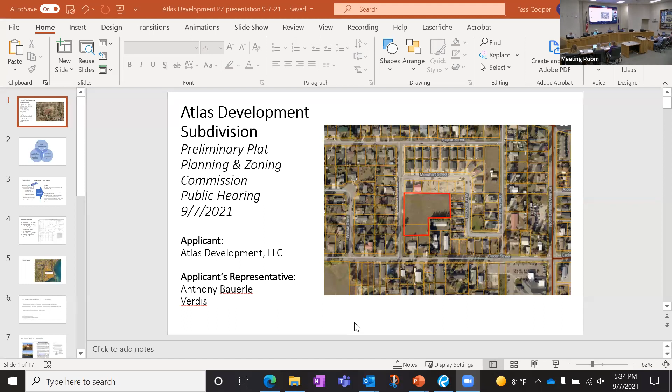Okay, this evening we're here to hear the Atlas Development Subdivision Preliminary Plat. Applicant is Atlas Development LLC. The representative this evening is Anthony Bauerle from Verdis.

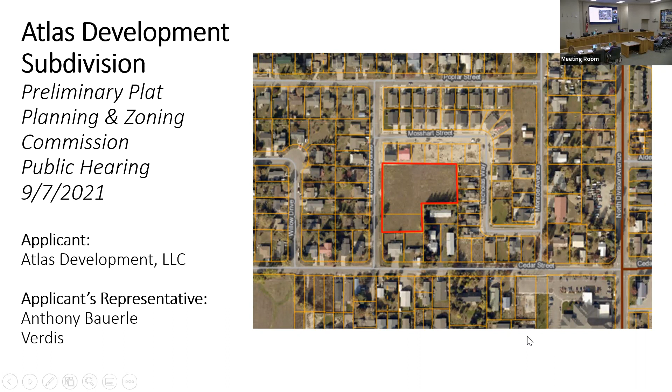And I know you've seen this diagram before. Subdivisions are a combination of comprehensive planning, zoning and subdivision codes, as well as transportation plans, and where they meet in the middle is where we have approval for new subdivisions in our city.

The procedures for subdivisions, quick overview for you. Preliminary plat stage is where we're at. This is where we overview the general compliance with applicable requirements, including zoning under Title 9, subdivision code under Title 10,

related plans, such as the comprehensive plan, the multimodal transportation plan, and the urban transportation plans. And we look at adequate provisions for infrastructure and services, including any offsite requirements.

After the stage of preliminary plat, what happens after tonight if we move this project forward? The project proponents will develop the infrastructure as constructed in their proposed plans, and then once that is complete, then they'll come back with final plat.

We'll overview again for substantial compliance with preliminary plat conditions, the required public infrastructures, resulting in the lots available for water, sewer, or served by our water, sewer, emergency responses, and so forth.

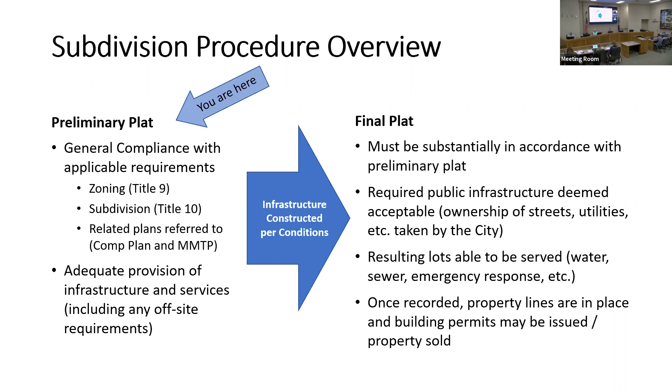Tonight, the subdivision looks a little bit like this. It is a proposal to subdivide approximately 1.79 acres into 10 buildable single-family lots, including 1 flagpole lot and 1 unbuildable stormwater tract. The lot sizes as proposed range between 5,000 square feet and 7,900 square feet. And the zoning for this designation is residential multifamily.

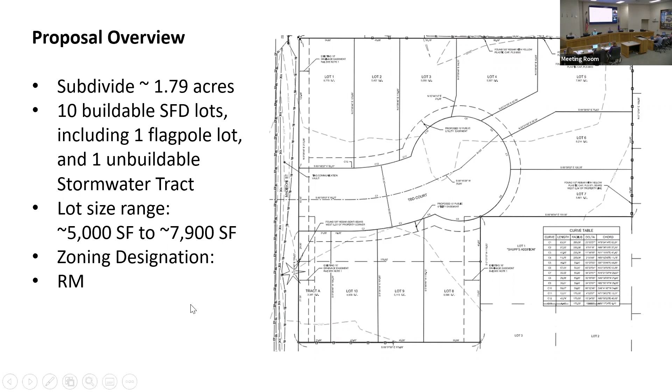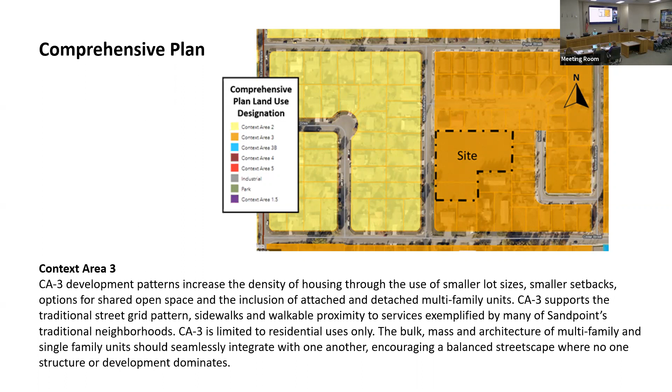Yeah, in this case, the block length is measured along the new street. The distance between intersections is also cited in the staff report in a separate section. Is that 300 feet as well? It is more in the 250 range. I'm sure I can dig it up, but 273 and 224, I believe, are the approximate distances. Okay, thanks, Tess. Yes, sorry. Thank you, Dan.

The zoning designation is residential multifamily, which requires a minimum lot size of 5,000 square feet. All of the lots have or will meet this requirement.

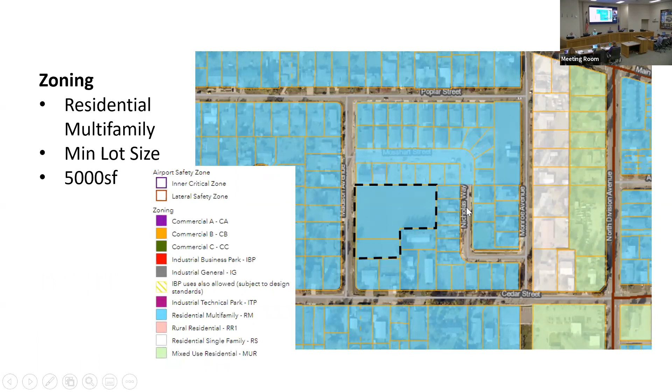An overview of the subdivision plat map, again for your review.

And a quick overview, I apologize, it feels like these are out of order. They are, I'm not sure why it's not showing them all in that order. Skip it. I apologize, for some reason it is skipping every other slide. Just hitting the next bridge slide. So that's what threw me off.

So your packet materials, I'm going to go back and add in here for you. I apologize that it'll be in not view mode, but I think we can see it well enough. Included in your packet materials is the staff report analysis with complete application, showing substantial compliance with city code standards and adopted comprehensive plan materials. Attached with the staff report are the following documents for your review: the subdivision application, narrative, preliminary plat, preliminary improvement plans, trip generation, required public notices which we've amended, and written comments. And that's where I was supposed to introduce you to the amendment to the packet.

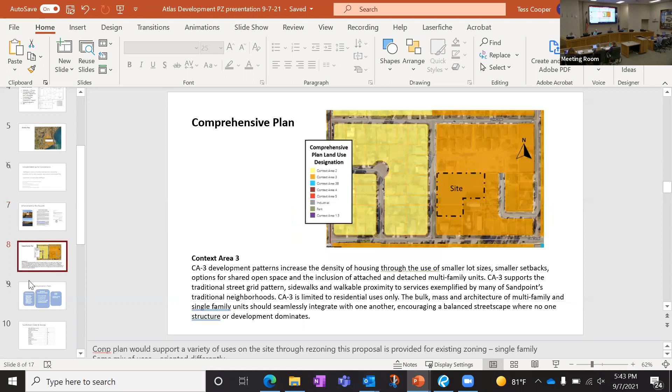The overview of how it meets the comprehensive plan and transportation plans. The comprehensive plan refers to the preference of traditional grid street patterns and the charm of neighborhoods with block lengths, and we've discussed how it meets these block lengths. Zoning code and subdivision code also address those and specify a 150-foot intersection requirement. Here are the numbers: the intersections are 234 and 270. The multimodal transportation plan, as well as the urban area transportation plan, also specifies intersection spacing of 250. So the majority of these are met—in fact they're all met—and the discussion is available in your packet.

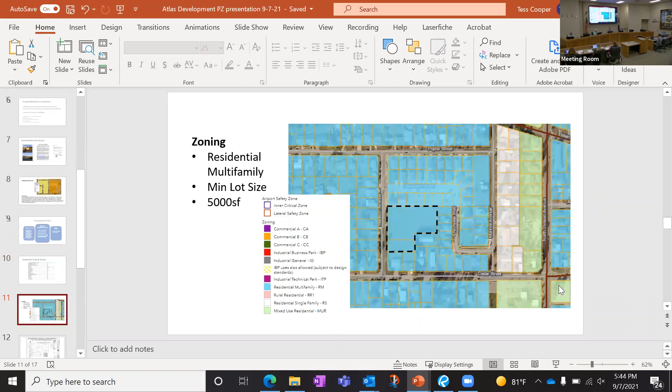Subdivisions and zoning. We've gone over the three Venn diagrams, and I showed you the overall plat again.

An important part of this packet is our public comments. I have a comment matrix here for your review, with all of the comments received to date, starting with our comment in support.

Their comments were conditional support with road repairs. They're conditionally in support of this project with road repairs and improvements, and they are concerned with traffic levels in the area, but they are in general support.

There was no specific issue, and the position was neutral from Northern Lights. If no lot is landlocked, then there are no concerns. There was no position provided from the Independent Highway District. They're okay with this project as long as structures are single-family residences only.

The position is neutral. They're opposed to two-story homes, and they're concerned with dust control and stormwater efforts. Also a neutral position: no two-story homes, stormwater concerns, and 15-foot setbacks. Also no position.

No issue was provided, but a does-not-support position was offered. We have a concern with the infrastructure load of new residences on the small town reputation of Sandpoint, as well as affordable housing for our service workers. This commenter also does not support. Another concern with responsible growth and infrastructure needs, as well as affordable housing, with a do-not-support position.

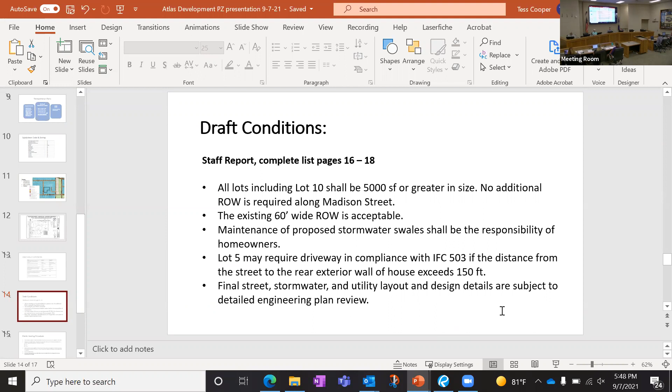The remainder of the procedure this evening is to hear a presentation by the applicants, where commission members may address questions directly to the applicant, and then open the hearing for public testimony.

Testimony will be taken in order: in favor, neutral, and opposed. We'll allow rebuttal testimony from the applicant after public testimony, then close the public hearing, and the commissioners will debate the topics. No new information at this time, only questions directed to city staff.

At this time, if we want to invite the applicant—first I'll see if there are any questions for Tess from the commissioners.

I have a question, Tess. You indicated on slide 9 - I'm getting your presentation mixed up with mine here, there it is, thank you - the comp plan has a preference for a traditional grid street pattern. This one does not have the grid street pattern; it's our third one in a row with a cul-de-sac. You made an argument, I'm not sure if it was you personally, but in the staff report on page 9 there was an argument for why the grid did not work in this case. Could you enlarge upon that, or is that something better asked of the applicant?

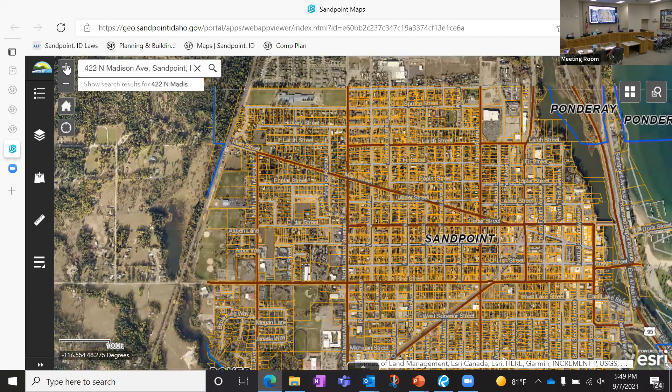There's a lot of what I call legacy lots that have not been subject to the traditional original city platting and grid pattern design, so that's what we're left with - a lot of odd and unique shaped lots with development that occurred all around prior to any preferences and regulations favoring that pattern. In this particular circumstance, the original grid pattern is visible nearby, but there's a very odd shaped development pattern surrounding this particular lot on the block. With these properties laid out the way they were, there's absolutely no way to add a through street in either direction. Because it's an oddly unique infill of the entire block, we're really only able to use a cul-de-sac in this particular circumstance.

It looks like no rights-of-way were reserved between those houses on Cedar Street and Nicholas Way, so there are no dedications, correct? Okay, thank you. I think that's all for the moment. Thank you.

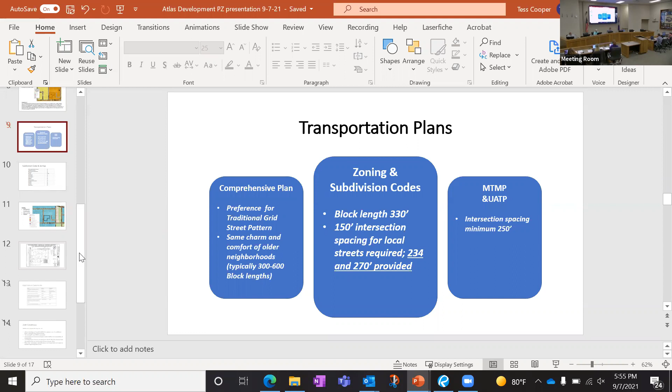Hi there. My name is Anthony Bowerly. Thank you, Chairman and Commissioners, for hearing this case, and thank you, Tess, for the presentation. It was very thorough. For brevity, I won't touch on too many things Tess already covered. I just want to highlight our intent to meet the regulating guidelines and guiding documents the city of Sandpoint has put forward, such as the comprehensive plan, zoning ordinances, the MTMP, as well as the UATP regarding traffic. I think she did a good job going through those, and as listed in the staff report, things were generally favorable and pretty conformative.

I wanted to touch on a couple things, stormwater for one. I know the design engineer on site has discussed thoroughly with Dan some concerns, and at final plat there will be an extensive design for managing stormwater. A stormwater management plan is required and will be completed. During construction, BMPs will be installed, and there will be a SWPPP and a construction general permit through the DEQ, which are required for this type of construction and land disturbance. At this point, I've been identified as the SWPPP inspector, so if anybody has questions during construction, they can call me. My information is on the application, so feel free to reach out anytime and I can answer those questions.

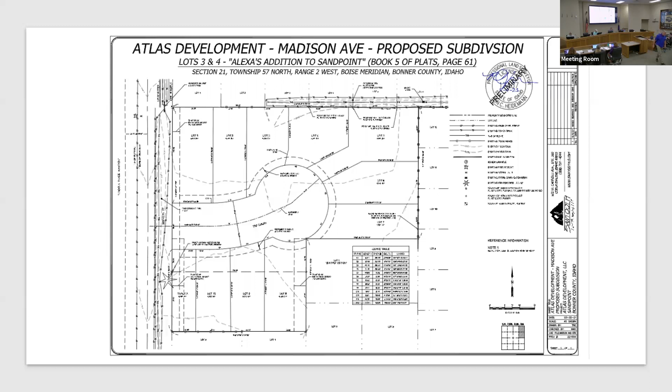Before the public hearing is closed, would the applicant care to offer any rebuttal testimony? Okay, thank you. All right, the public hearing is now closed.

At this time, the commission will deliberate. No new information may be provided, and questions may be directed only to city staff during deliberation. The staff report includes suggested motions.

I have a couple questions if I could. What is labeled as Tract A, that is the area that's being designated for stormwater management with this new development, correct? Correct. And is it possible that at this juncture, as this area is developed, the developers could work with city staff to improve the drainage problems that have already been addressed by neighbors?

I think that would be pretty challenging. I don't know the topography well enough to see what's existing. There is an effort underway.

The developer of the property to the north is working with those property owners on a solution for some of their drainage concerns, and that's being played out totally independent of this. And in your opinion, that's the best way to do it at this point? Absolutely.

Yes, to Scott's point, Mr. Brown, we chatted about this. He's done his due diligence here, and he's providing a plan that will send the drainage a different course, so we won't be adding to some of the issues that the properties to the north and the east have experienced here.

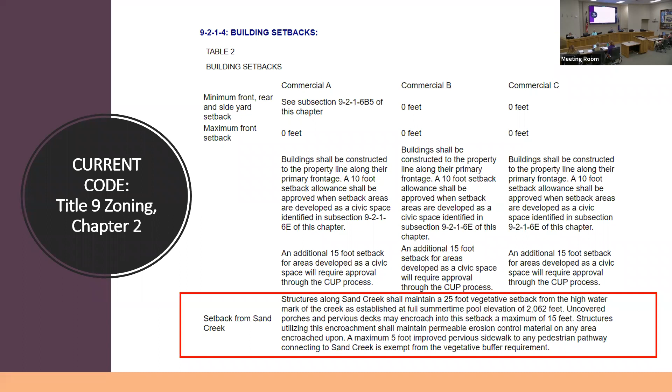And so this is the section where we're identifying the problems. In this next section, we'll talk about what the problems are or the missing pieces in this, and why it's important for us to really come back with a more comprehensive, detailed proposal for improving upon what is currently there.

So the limitations of this code are: we have a distinction between buildings versus structures that is not addressed—it just says all structures. Through International Building Code and stream requirements, it's really important for us to differentiate the definitions between what a building is and what a structure is. There are some relevant and important recreational, public access, and water dependent uses that incorporate structures that obviously need to be on or near the water and within the 25-foot setback.

The code lacks the flexibility to address site-specific conditions. In this downtown area, there's a lot of existing pavement and development as opposed to a vegetated buffer. To be able to look at site-specific requirements and conditions, it's important for us to add that in, especially with our other specific codes and links to stormwater management, FEMA, and other agencies and code-specific codes that are not addressed here.

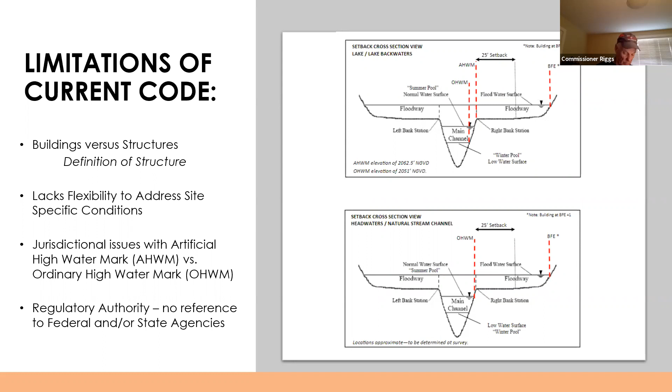Correct. And we absolutely have goals to do that detailed survey work, so that we have a much better idea in the future for the permitting process and administration of this code. At this time, IDL and ourselves just don't have a whole lot. So it'll be on a project-by-project basis to identify, which is a very common process in other areas and water bodies where it's not just a standard elevation called out in code, because it is variable. So it's really an important change for us to be able to adapt to here.

Do you mind if I interrupt for just a second? I know you wanted to get all the way through, but I think this is way more complicated than it needs to be. I think Justin from the IDL said it very clearly: the artificial high water mark is 2,062.5 feet, and the ordinary high water mark is 2,051 feet.

So my question is, the proposed amendment says where an artificial high water mark does not exist, buildings shall be set back a minimum of 25 feet from the ordinary high water mark. Do we know, yes or no, where artificial high water mark does not exist between Bridge Street and Cedar Street?

That's the detailed surveying, and that will be the project. Until we are able to do citywide surveying ourselves and get an idea of that, each project will have to survey those locations and show us where they are on their site plan.

Is it possible that one property owner could argue that an artificial high water mark does not exist, and then be able to build within 25 feet of the bottom of the creek, because that's the ordinary high water mark? No, but it really is clear where there's lake backwaters and where it's a natural channel.

So the incorporation into the proposed new code of the collaboration and cross-referencing with the other federal and state agencies is really key here. Our previous code didn't defer to them, right? That collaboration and cross-reference is going to be really key, because it would be the Department of Lands determining, upon a case-by-case survey, where that artificial high water mark applies and where it does not.

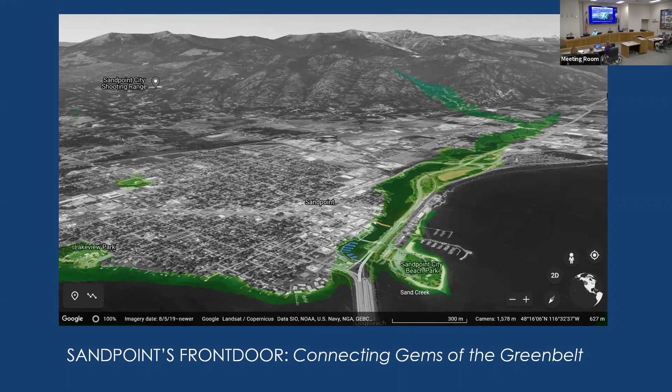Specifically for the implementation of the Park Master Plan concept for the Sand Creek downtown waterfront area, which is one of the concepts approved in the master plan, we are looking specifically at this one site - one we're all very intimately familiar with, and the site I've spent the most time on along the creek in my last few weeks. This is truly your gem, and also the same site where we're looking at continuing revitalization, something you're going to continue to hear a lot of enthusiasm for from the development community.

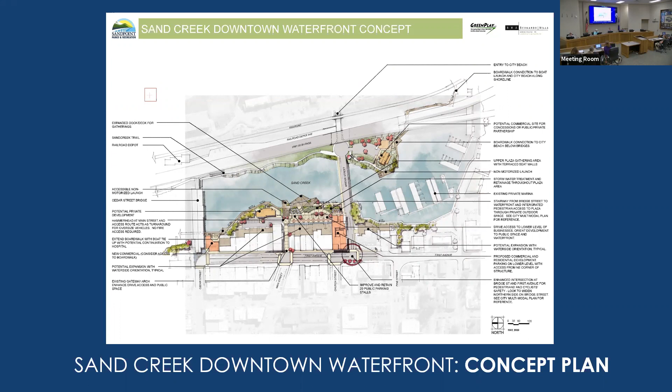This is the example concept plan that I'm choosing to focus on. This is the plan that was approved in the master plan, the Sand Creek downtown waterfront, and you can see how it's directly impacted by the code changes, and some of the development in there does overlay into the waterfront.

This next slide is the same area just blown up, and the highlighted areas show the priority areas for development of the Park Master Plan. You can start to see the picture come together, and keep in mind that this is merely a concept.

As the Parks Department develops this master plan, we take it from concept at the 30,000-foot bird's eye view and dive into detailed design development. We'll work hand in hand with the community through the public process, which will be incredibly transparent and dynamic. Your community has a strong track record of public process, and we are going to continue to build on that through this step.

But you can see right off the bat, as you blow it up, how we would start to be directly impacted with the potential to improve access, which was one of the driving priorities of the master plan.

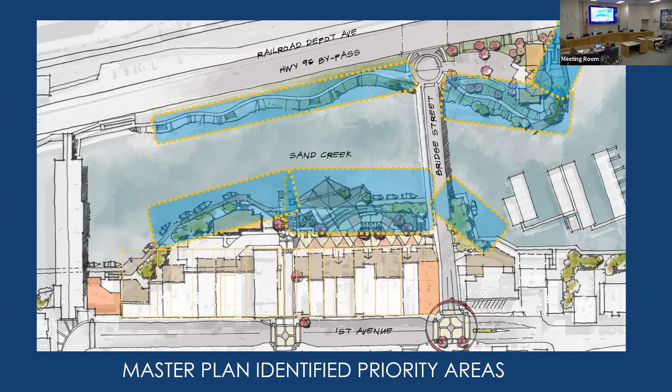This is a visualization, again painting the same story just in a different view. It shows how the 25-foot setback—this is an artist's interpretation, but an approximate 25-foot setback—would be directly impacted by the master plan overlay. You can see where my cursor is.

I overlaid the concept master plan, and if the code wasn't changed and it was left as it currently is, we couldn't build any of the boardwalk or plaza features proposed in that approved concept plan. Again, I want to remind you that it is just a concept, so as we dive into design, we'll have ample opportunity to influence its details.

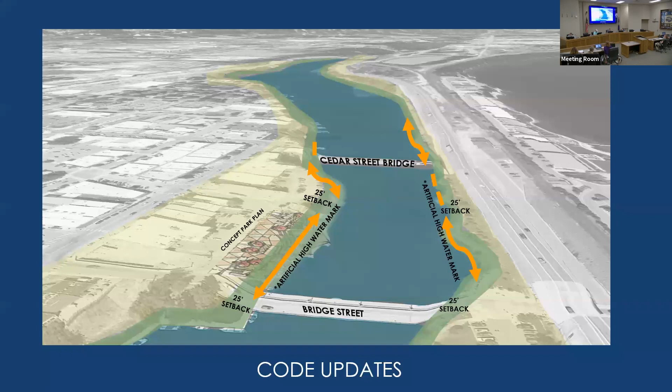That's something I highly value, and it's something I'm here to share—my years of knowledge working on waterfront projects with you, from a sustainability perspective, to the point where I'm brave enough to put in here innovative stormwater treatments as something to start thinking about.

This is just a sample rendering of what it could look like if we did start to have a combination of innovative stormwater treatments and some sort of vegetation buffer. All of a sudden now we're introducing inclusive access for people of all abilities and disabilities to the waterfront.

Across the way on the east side, that's actually a pretty similar section of what the existing conditions are, where you do have a substantial buffer and then a trail corridor—all public gathering places.

Keep in mind that when we talk about the Sand Creek area, none of that is natural—all of it has been disturbed historically. So what we're proposing through the master plan and the park plan implementation is actually making this man-made, or I should say man-destroyed, area just so much better from a sustainability perspective.

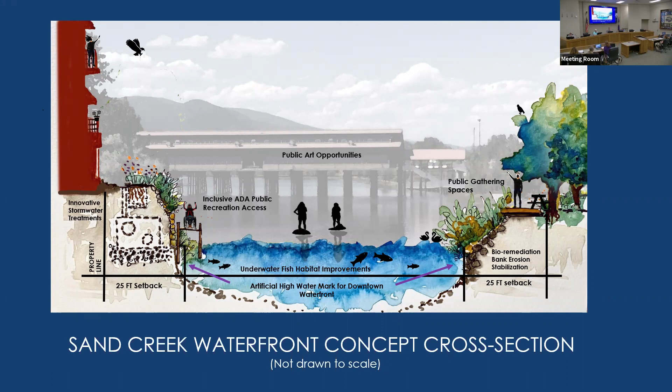So we have incredible opportunities with this new code change. I dare say, when I'm talking about what I'm referencing here, it's the stormwater runoff—that's where the nitty-gritty engineering and science and design really gets technical. This is where our opportunities are.

This is the meat and bones of the project. It's not in the plazas and the boardwalks—it's in what we can do underneath the soil, underneath the water even.

So when I talk about stormwater runoff, I'm not just talking about the surface, but it does start at the surface—it starts on the rooftops, it starts with the pavement, and what are we going to do there? Then we ask ourselves, what are we going to do just below the surface, and even more so under the water? How can these public assets, this park property, treat the stormwater runoff in that area?

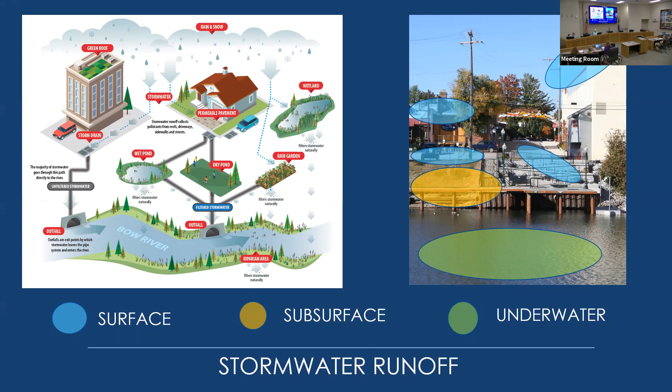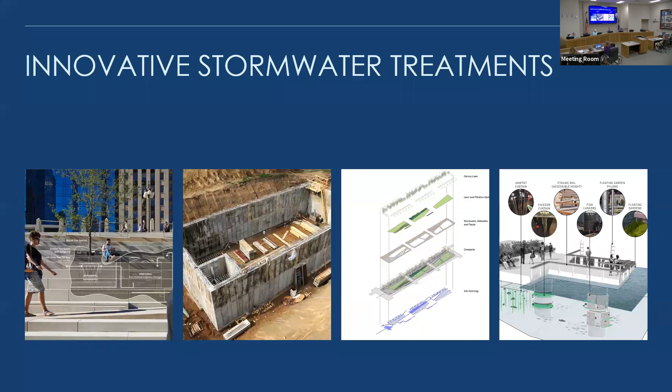The sample on the right is an award-winning project out of Chicago where they took the pilings that were structural components and added fish habitat plantings along there, creating the right environment to increase the fish habitat.

This is an example of what it could potentially look like in those areas with public waterfront gathering places. We're going to be revitalizing the community, but also activating it, making it safer for all, including people with disabilities to be able to come here.

The population of Americans who are becoming disabled - 1 in 4 of us will become disabled by the time we're a senior - and we want to be able to serve that population. Right now we have very limited access for people with disabilities to the waterfront.

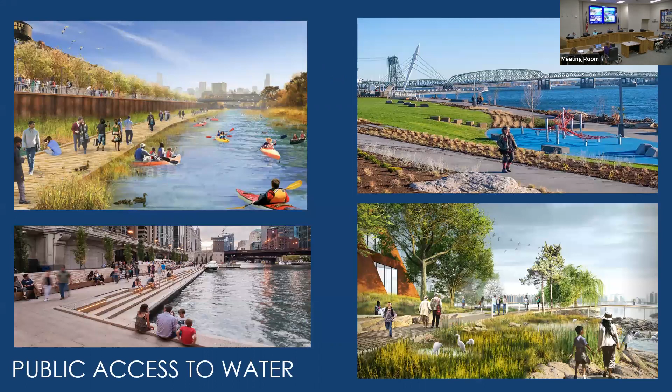Some of these other pictures, like the third one over on the right, show a floating wetlands. That floating wetlands is filtering the waters at a whole other level. So there are different ways we can integrate innovative stormwater treatment facilities into the public gathering space.

These are more examples of public access to water. I think the top left one with the boardwalk is very similar to what you have right now, particularly along the east side without the grade change, where you have the vegetative buffer and that stark wall.

I can imagine our wall along the east side being integrated into the art and historical plan in a much more creative way, activating it perhaps with a playground or something that also has a filtration system underneath the surface. The picture on the lower right-hand corner, the very green lustrous one, is really symbolic of what it could ultimately be if the ecology is brought to its vibrant life.

This mixed-use waterfront development collage shows the art of the possibility with the activation, the dining right up against the water, the evening lighting that could occur - not necessarily causing night sky influence, but more downcasting - adding an ambience that activates the site, and most importantly, activating it year round.

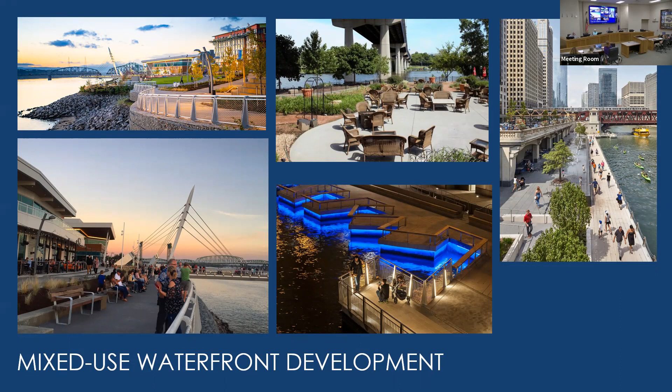I've heard from a lot of you and read in the plan that it's not activated in the winter, and imagine what we can do if we develop that area.

Of course, with the master plan and the concept comes additional recreation programming, which is another layer of development. A lot of what you've seen are pictures of the actual infrastructure, but this talks about how we're going to use it, how we're going to activate it, how we're going to get vendors down there and really engage the community and our visitors with the waterfront. This is just samples of what we can do.

Maybe we have a theater down there. Maybe in the wintertime there's ice skating. The art of the possible is endless right now, and it's a wonderful time to see this realized. And with that, I'm going to turn it back over to Tess.

So bullet point number 3 is our downtown revitalization plan that we've been working on for over 20 years now. There's a focus point from the community to increase economic vitality in this area, between Cedar Street Bridge and Bridge Street, and that whole downtown area - reorienting and creating a focal point of the water, having things completely facing that direction, and adding more access and pedestrian accessibility and usability of this natural asset that we have.

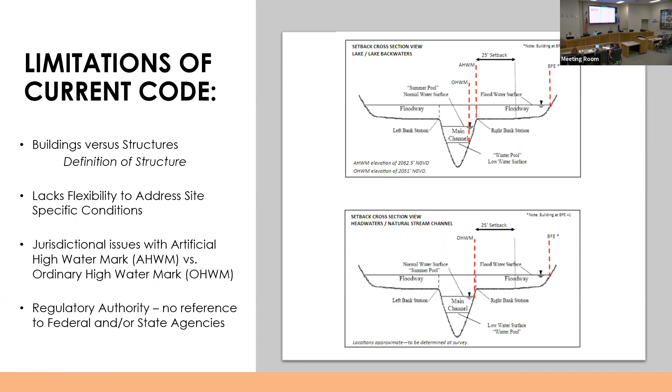But FEMA will not allow you to build inhabited structures over water. So even more to your question, we can't supersede that. There's getting even more stringent requirements for buildings because it is a FEMA flood zone. This was one of the reasons to really clean up this code and give credence to the other agencies and regulatory authorities. One, we overreached into jurisdiction that's not ours. Two, we need to require these applicants to comply with all these other state and federal agencies and regulations, which wasn't currently in the code.

So essentially with all of those requirements - the collaboration, the cross-referencing, pulling our hands out from where we don't belong and giving jurisdiction to the agencies it does belong to, and adding the conditional use permit process - we belt and suspendered the city's opportunity to still have a say, making sure it's not completely out of our hands when a decision is being made by one of these other jurisdictions.

And we're adding the stormwater option, or requirement, so that anything running off of these properties has to be managed in a way that's best practices or best management plan. Technically it's already there - anything built right now, we have the stormwater ordinance and they have to comply, but it's just not linked in for us to say, oh yeah, we have to do this as well, or for applicants to understand that's going to be a requirement.

And that's just the last point in this - F and G is exactly that. We shall notify all the other agencies, and city permits shall be issued with conditions that they meet all of those other regulations through all of those other acts, which include federal guidelines for erosion, sedimentation control, riparian areas, the Clean Water Act, the Endangered Species Act, and so forth. So F and G is truly just creating that necessary coordination with those regulations.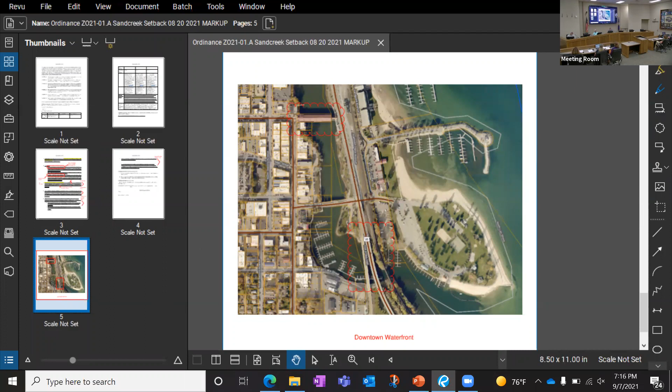I may be mistaken, but I thought I recalled from maybe the first time this was presented to us in early August that it was only Commercial A zone being proposed for this amendment. Is that correct? Was Commercial B added later on? Was it always A and B, Amanda? Okay.

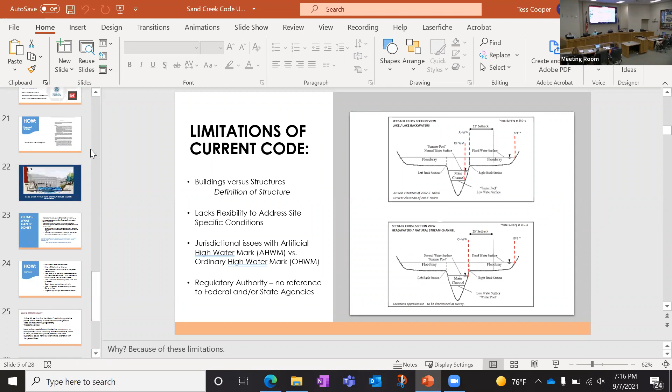Is that the end of your presentation, Tess? No, sorry, I'm trying to find my way back to where I was. Thank you. Okay, yeah, perfect. So, oh, this is your. Yes, okay, so I'll let you talk. So we just want to give you a visual of what we're talking about.

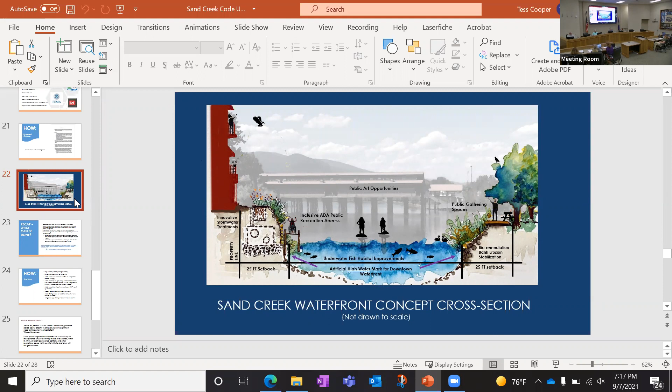Now we're going to dive into the recap of what can be done. So when you're looking at this graphic, this is the graphic version of what can be done. You can see here how it interacts graphically. And then this gets into the details of it. Do you want to dive into there?

We can, I think we were going to cover most of it. So buildings with the 25-foot setback, we can build buildings up to the 25-foot buffer or the applicable high water mark. We can build other structures on land. We can build other structures, not buildings, into the creek as permitted by the state and federal agencies.

So this is reinforcing what was already said, and as a conditional through the city conditional use permit, it's a series of checks and balances, really, is what we're saying. And then, just reiterating what the conditional use permit does - it's the belts and suspenders regulating the land uses by applying specific site-specific conditions. And that's important to note, that it's very site-specific, it changes throughout the whole corridor.

It's a fine line on the type of conditions and authority per land use act. It's a very delicate balancing act in the private property rights with the public interest. And a good example would be, say something comes through our review process and the state permits a new dock. Everyone can imagine what a new dock might be. What we could do through this process is, with this code change, we could then say, we would like to